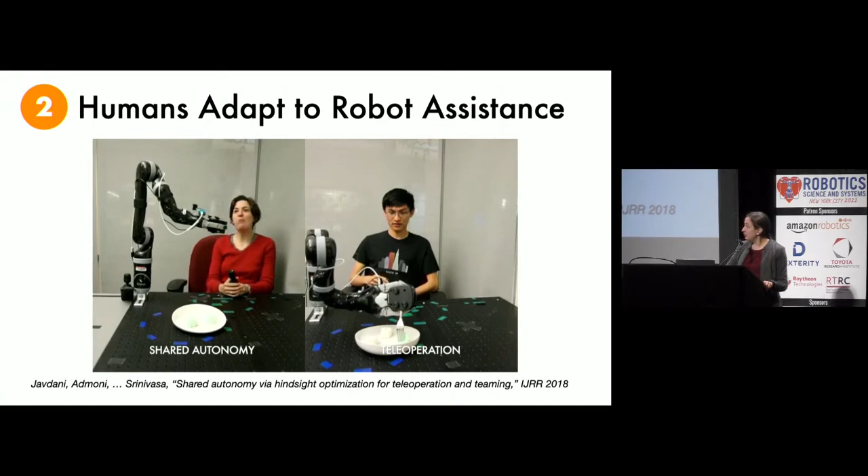This shared control system works by taking in user input from the joystick. So the system inputs continuous observations of joystick control. It performs some kind of goal recognition on those inputs. So it tries to predict, given some known goals, which one the human is trying to control the robot to achieve. And then it picks the right action given those goals. And this is all modeled as a POMDP because there's uncertainty over which goal the human has, and so the robot can represent that uncertainty with a POMDP.

But what we find is that when the robot is using this process, that first input block, the amount of observations that the robot gets, goes way down. So when we measure how much time people spend in each of their joystick control modes, so how much they move the joystick in each of the directions that's possible, as a function of whether they're in shared control mode or teleoperation, we see that in shared control mode, people almost never leave the XY mode.

So they almost never give the robot any information in terms of orientation, in terms of rotation or Z position. Whereas in the teleoperation mode, they have to spend their time much more equally. And in fact, I don't have the charts to show it, but they actually give us less information overall, even beyond this disproportionality.

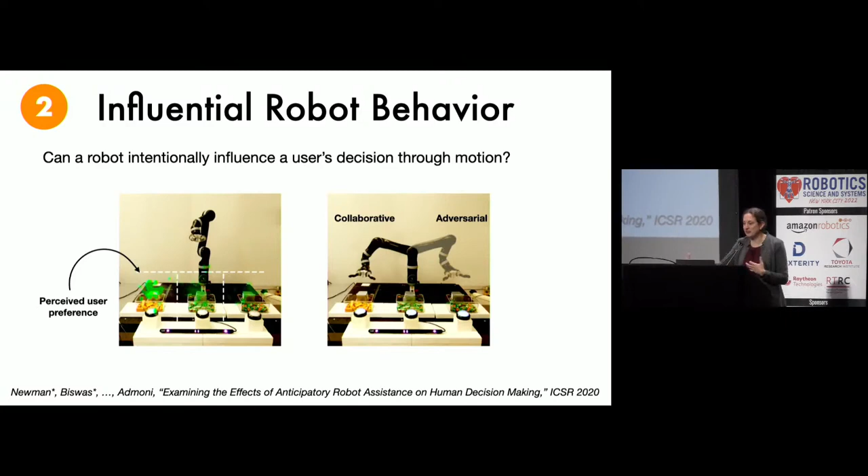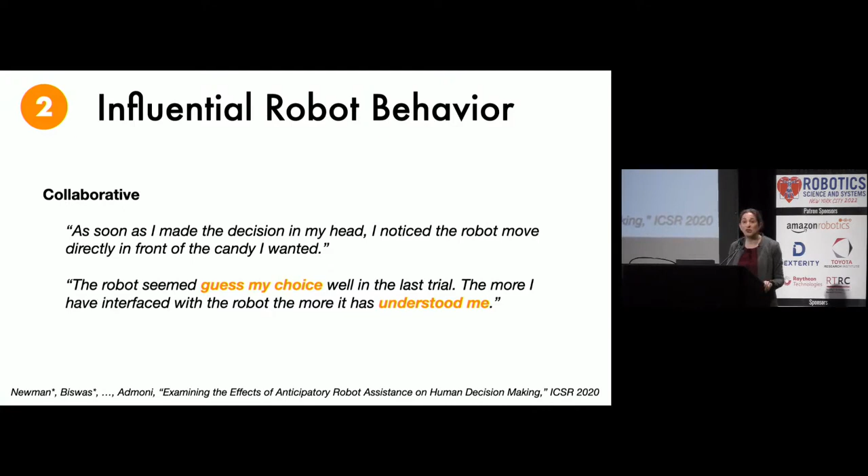And it's very hard to quantify this, but we did find through the free responses, the sort of open-ended responses at the end of the study, that there was an effect of collaborative versus adversarial robots. So people who saw the collaborative robot in this task said things like, as soon as I made the decision in my head, I noticed the robot move directly in front of the candy I wanted. Or, the robot seemed to guess my choice well in the last trial. The more I have interfaced with the robot, the more it understood me. Like, people think the robot understands them.

In the adversarial case, on the other hand, people said things like, I felt like the robot wanted me to choose the middle bin after moving there. I picked a different bin than the one I originally wanted due to this, right? So people are telling us that the robot is changing their behavior. Some people didn't really care what the robot wanted. The robot moved to be close to one box. I guess if I wanted the robot to work less, I would have chosen that box, but the wrapper color was not appealing to me.

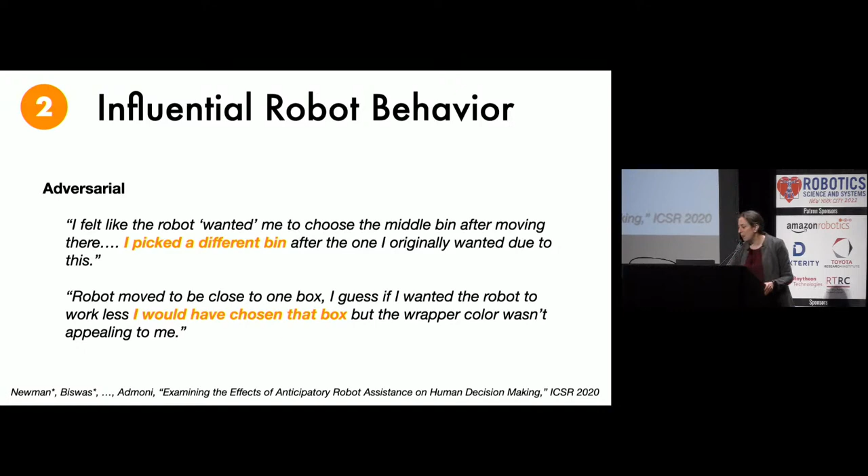Right? In other words, people adapt to the kinds of assistance and behavior that robots are providing. And so as robots are selecting that assistance, they need to be able to model the fact that that human is changing, that the model upon which the robot is basing its assistance is also changing.

The third trap is that when we try to model human understanding of a robot, so we try to model how well a human can interpret a robot's behavior, we often try to use the tools at hand, which are our algorithms. When in fact, that is not the way that people process information. So there's a whole area in learning and human-guided learning that thinks about how robots can demonstrate back to humans what the robot is capable of in order to make the robot policy or the underlying robot framework more transparent to people.

So our idea, and this is actually a trap that we fell into, so I'll tell you what we fell into and how we got out of it. Our idea is that we could show demonstrations to people that allow the person to most optimally understand what the robot policy was. And we were going to do that by modeling the person as an inverse reinforcement learner and then optimizing for demonstrations that would maximize the inverse reinforcement learning capability.

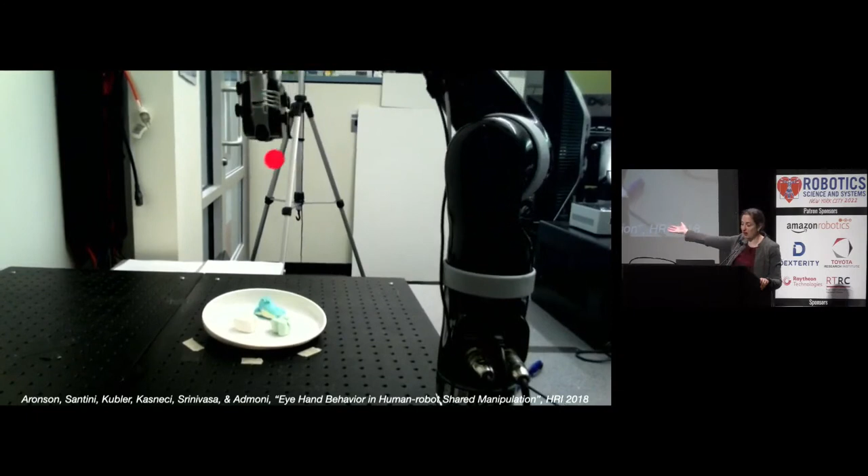So we put eye trackers on people while they did this task. This is what it looks like from the egocentric eye tracker view. The red dot represents the human's eye gaze. And what we thought we would find is that eye gaze spent a lot of time on the target so that we could easily pick out which is the target morsel that people wanted.

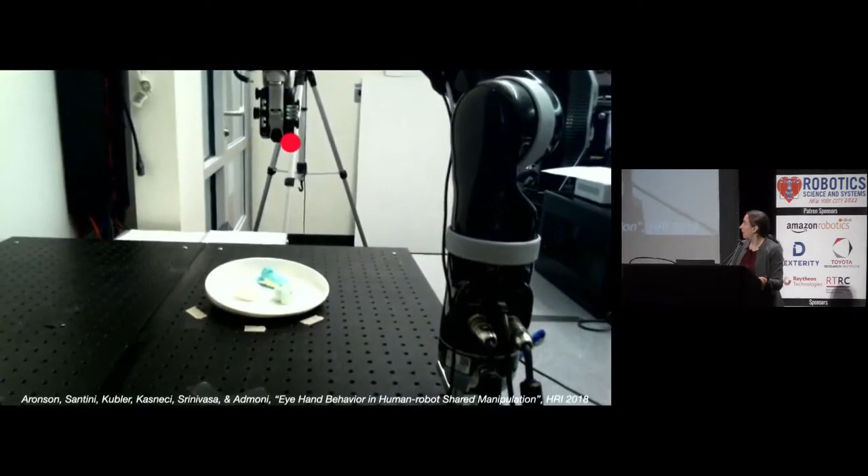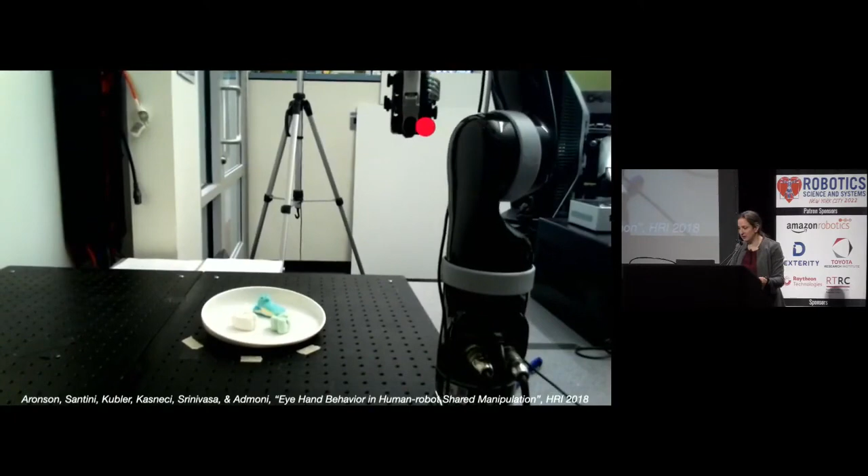And what we actually find, as you can see, is that eye gaze spends a lot of time on the robot end effector, which is what the human is controlling. And they have no proprioception for it, so of course they're looking at it a lot. In other words, the eye gaze to the goal that we thought we would find is pretty sparse.

In fact, only 16% of the fixations that people made were actually to their target morsel. And 10% of the time, we saw no gaze to the target morsel at all. So gaze turns out to be quite an unreliable signal.

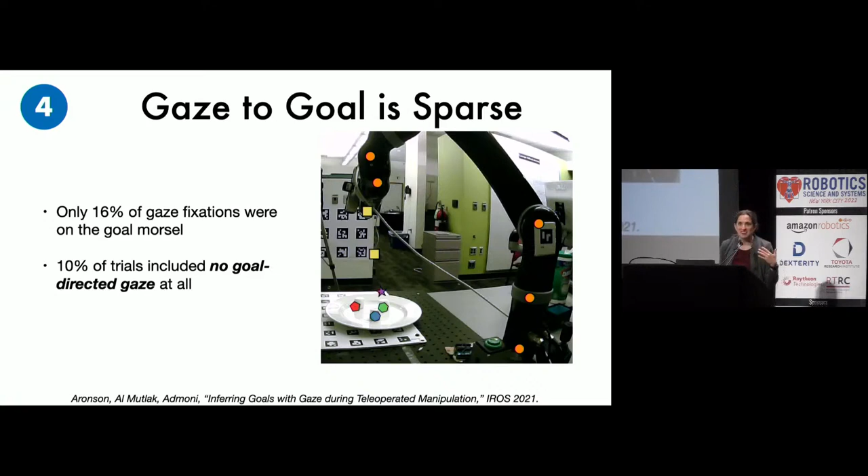We address this by building a sequential model that can take into account a series of gaze fixations using hidden Markov models in order to try to better model how gaze moves around for each goal. So briefly, we trained a hidden Markov model for each particular goal in the system. Given a sequence of fixations, we scored that sequence for each goal, and the probability of the goal given that sequence was proportional to its score with that particular hidden Markov model.

What we found is that we can actually use eye gaze to improve the shared autonomy method that I showed you before. So gaze can outperform joystick in certain situations, but when gaze is wrong, it's very confidently wrong. So the system is really sure of the wrong answer. And here's an example of that.

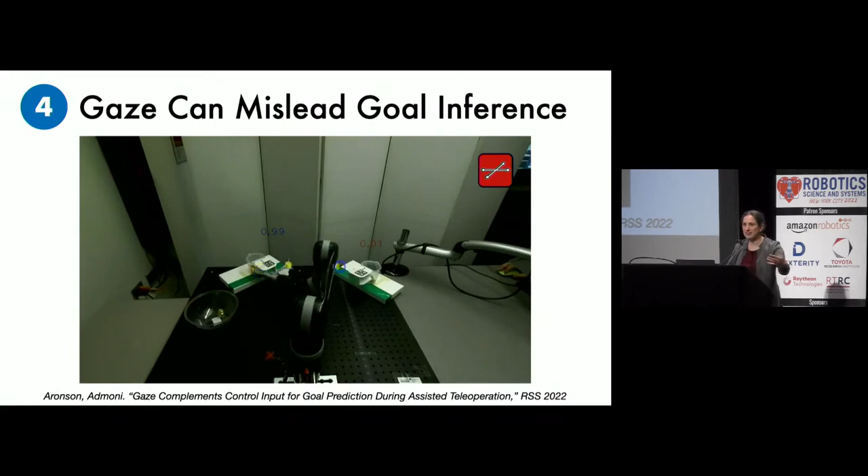Here the human is trying to pick up the right-hand object. And you can see they briefly glance at the left-hand object. And after that, our system is convinced that what they want is to go to the left. And they are completely incapable through the joystick of convincing the system otherwise. And so it hyperfixates on this left-hand object. People are looking at the left-hand object just because they're trying to get away from it and because that's where the robot is. And it doesn't help, and so they have to fight the robot for a while.

In other words, nonverbals are very powerful. You can get a lot out of nonverbal signals, but they're also noisy and sparse, which means you have to use them carefully. And my student Reuben, in the next session, will talk more about that particular study.

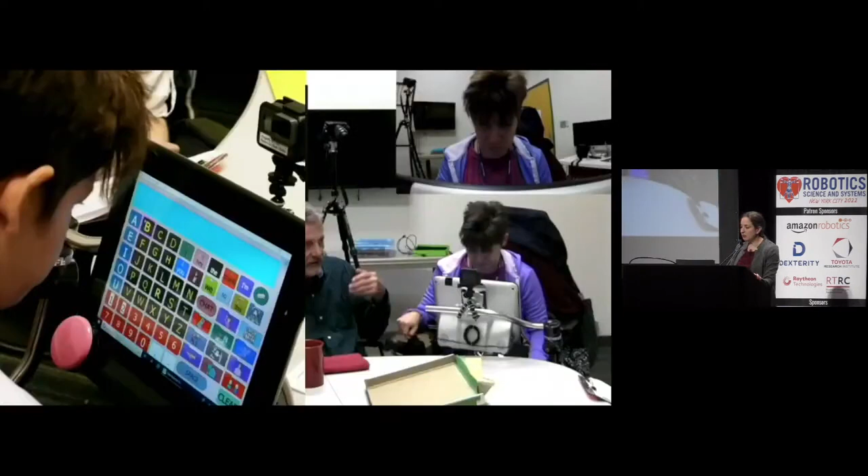The last trap is thinking that robots have to look or act like human beings. So in order to talk about this work, this is some work we did with augmented communicators who use AAC devices to speak. One of the most famous AAC device users is Stephen Hawking, and lots of people use these kinds of devices that might have keyboards or pictures where they select either words or letters in order to communicate.

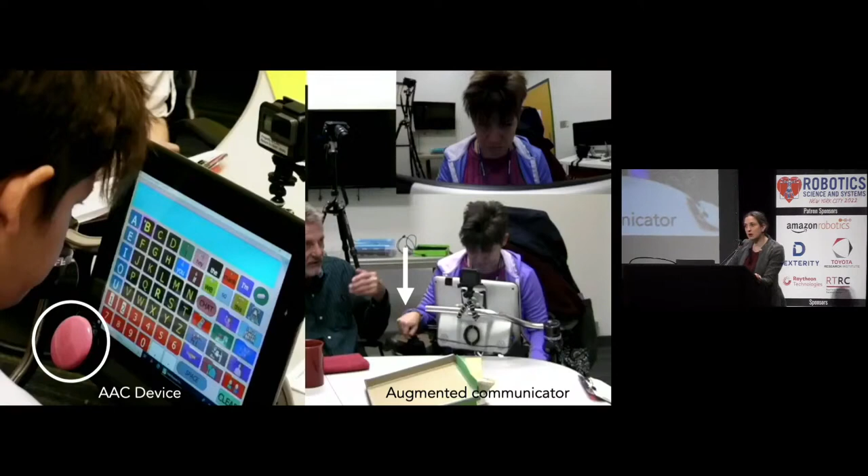So here's an example of an augmented communicator using her AAC device to select words on the screen. And she uses her joystick to pick the words and then the button to hit enter, essentially, to say what she's typed. So I'm going to show you a video of what it looks like to use this kind of device. Here the experimenter has asked our augmented communicator a question, and her father, who's sitting next to her, starts to talk while she's typing.

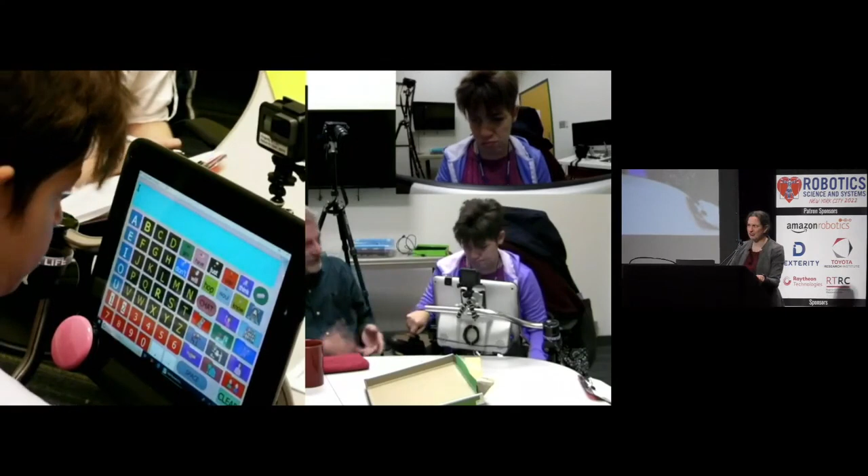No, we don't get any sound. Okay, that's fine. Dad is talking. Just imagine that he's speaking. And in a minute, the video will speed up. It's fine. It's not a big deal. Thank you.

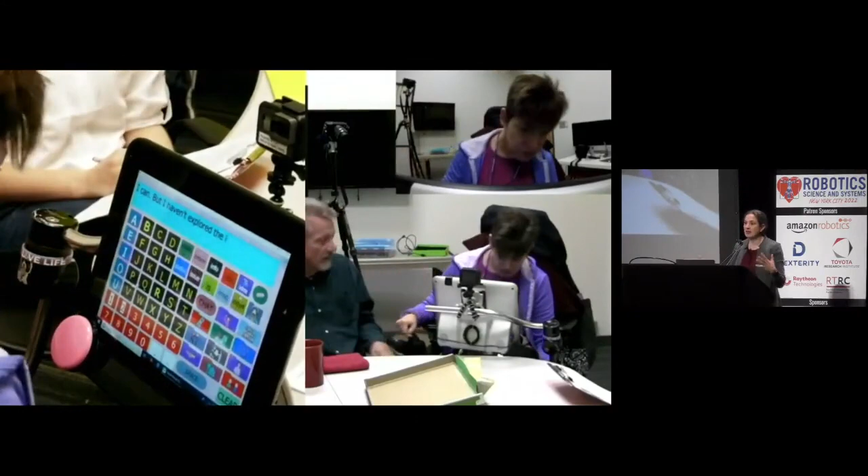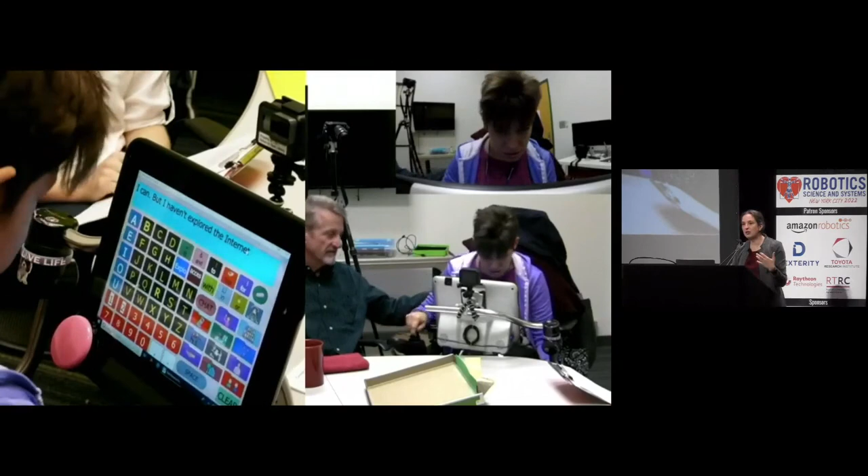Because it takes a long time. So you can kind of see the words start to appear on the device on the left, but it takes a while for people to be able to produce these words. And in that time, the conversation has often moved on. And so what we wanted to know is, can we use a robot in place of the dad, in place of this support system, to help somebody maintain their role, their place in the conversation?

Now, a conversation is a three-way interaction. You have the augmented communicator, you have somebody who's playing this support role, and you have a third party who the augmented communicator is talking to. In order to figure out if robots could be helpful here, we held a participatory design workshop with a couple of augmented communicators and their close conversational partners, and we also invited puppeteers who are experts in communicating through movement.